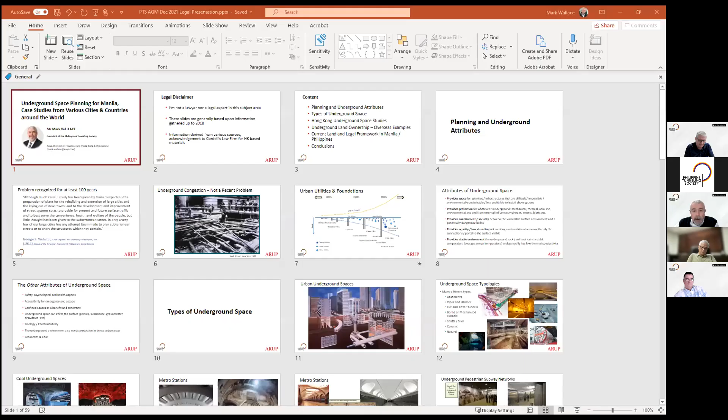Can that be seen? Can you see that? Hi, Mark. Yeah, we can see all of your slides. Okay, there you go. There, yeah, you can see your presentation. You can see my face.

Excellent. Okay. All right. Well, this evening, ladies and gentlemen, I'd like to run through some underground space planning reviews that we did for the projects in Hong Kong and also in Singapore. So I want to just give you a flavor of the different strategies that have been done for underground space planning in other cities and countries around the world.

So I have to put a legal disclaimer in first and say that I'm not a lawyer, right? So some of this information that I'm going to present is from a few years ago, but most of it should be still current. And I have to give credit to a law firm that helped us in Hong Kong when we were doing some of the materials about the legal aspects of land supply and underground space in Hong Kong.

So tonight I'm going to run through these aspects, planning and underground attributes. This is the subject matter that I'm going to go through, and then hopefully at the end run through some insights or conclusions from my brief period in time in the Philippines, how maybe there could be better planning put in place for some of the upcoming metro systems and underground metro systems that are being implemented in the city.

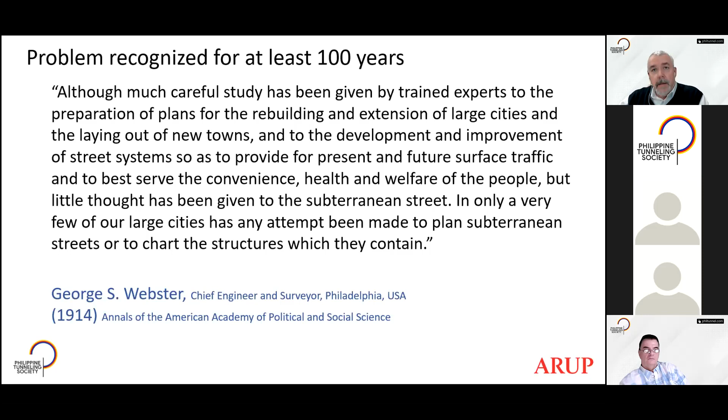What are we talking about? So, the underground and how we use the underground is a problem that we've recognized for a long time, actually. In 1914, the chief engineer in Philadelphia recognized that little thought has been given to the subterranean streets, and only in very few of our large cities has any attempt been made to plan the subterranean streets or to chart the structures which they contain. So this is talking about really utilities and all the things that go in it, right?

And this is a photograph from Wall Street in 1917, and you can see this is exactly the same as what you see in the ground in many, many cities around the world. Manila obviously has a lot of this above ground, where you see the cables and so on, but underground you see all of the pipes and networks that crisscross. It obviously needs to be managed and understood really quite well.

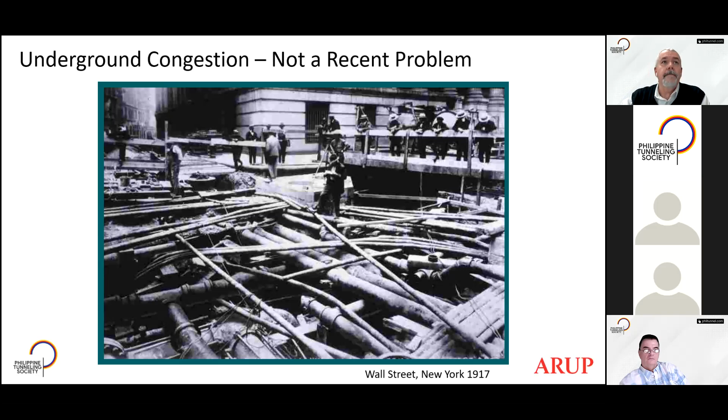So as we progress through our urban growth, from the 1800s up till now, there's been a transition of different types of things. Foundations have progressed through shallow foundations, wooden piles, caissons, Franki piles that were in vogue in the mid 60s and 70s, barrettes, mini piles, and so on. As we've done that, we tend to find that these piles and foundations go deeper. We also tend to find that they're supporting heavier structures.

And in addition to that, the congestion of all of the other supporting infrastructure, such as sewage, water pipes, and utilities, is also tending to get deeper. And that's just a function of these systems all being on top of each other and being congested.

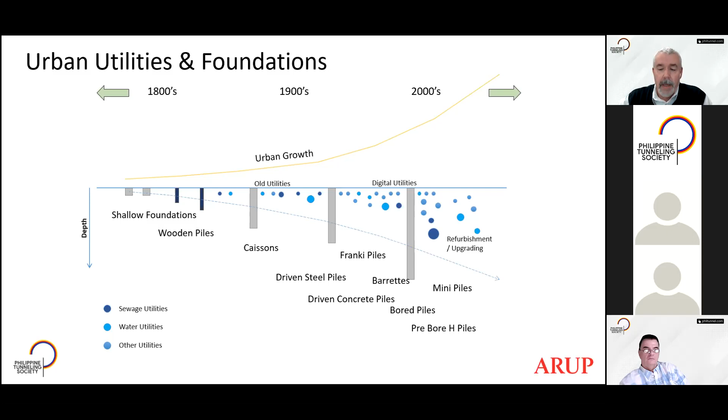So what is it with the underground that we like to have? It provides space. These are the attributes that people think about when they're thinking about the underground. It provides space for activities and things that service our cities. It provides protection where we need it. It can provide mechanical, thermal, acoustic protection for things that go in the ground, and removes impacts from wind, from blasts and other things.

It provides containment, so it can be used as a secure place to put things, and also protect us from the impacts of any particular dangerous facility. If it was an underground magazine, for example, it obviously reduces the impact of blast and so on. And then it also provides low visual impact. When you go to BGC, you see that most of the utilities are underground. All of the overhead cables are now hidden below ground.

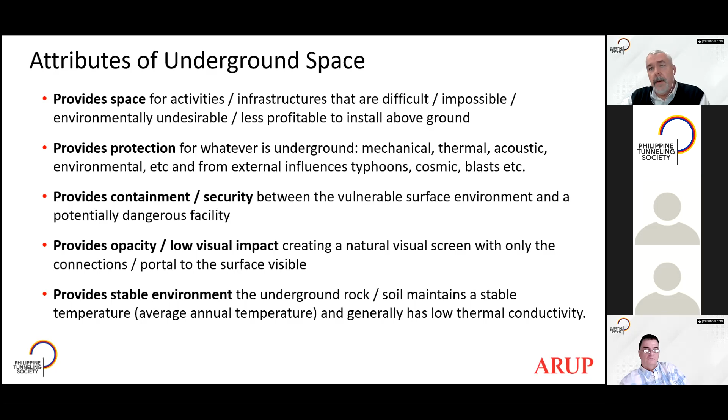It provides a stable environment. When we talk about sustainability these days, we talk about the use of energy and so on. And when you look at the ground, typically within the top 10 meters, the average annual temperature is the temperature that the soil and the rock generally will have. And it has some low thermal conductivity properties that are sometimes useful.

But some of the other attributes of the underground relate to the psychology of the underground. You feel worried when you go underground. People think that it's not so safe, and it can have health problems because of air quality and so on. But certainly in Hong Kong, where I am just now, many millions of people travel underground through the metro systems, and they don't really notice it because it becomes part and parcel of the work and lifestyle in cities. And that's what's going to happen in Manila soon, when the metro systems come and people get used to traveling underground.

There are other problems for emergencies and escapes. So, you know, when there was the sarin gas attack in Tokyo, Japan, how to get people out and do that safely. And then confined space can have that benefit and also have constraints such as evacuation and getting out of the ground.

But there's also problems where we have the underground and we have to have the entry into the ground. So portals, how do we get entry into the ground? We have other aspects of construction, subsidence, groundwater drawdown, and then the type of geology and how easy is it that we can build the undergrounds through the pipelines or the basements in the cities that we have.

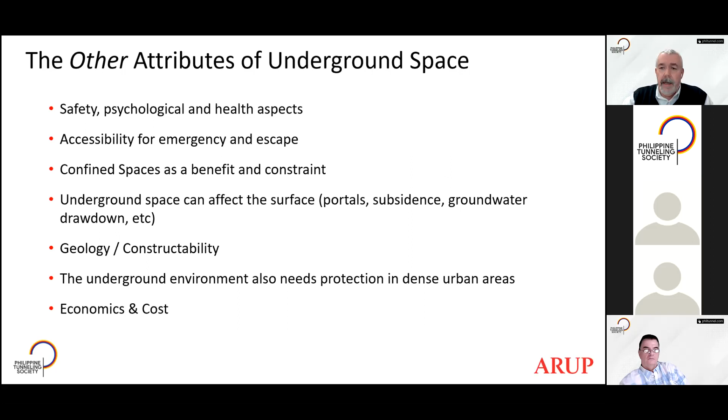And the underground environment also needs protection in these dense urban areas. So if we want to use this corridor for a tunnel or a pipeline or whatever, maybe we need to protect that in some way. And then obviously the economics of the whole question of going underground, it does cost more and it does have an impact in terms of how you can use it for development.

So what are we talking about when it comes to types of underground space? So back in the 1960s and 1970s, and maybe even earlier than that, in the 50s, there was this sort of urbanism that had this vision that we would all be living underground and sleeping underground and have residential underground. And this sort of came out of the Paris urban ideas, and the French architects and so on were quite keen in trying to push this forward. And many of these integrated urban underground schemes were put forward to try to connect in with the metro systems in France and other cities around the world.

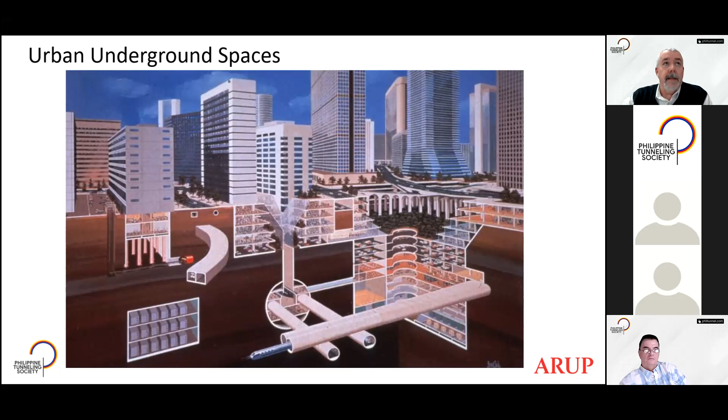So there's different types of underground space that we typically talk about. So we have basements, and we know that in Manila, in particular, there are really quite deep basements. And some of the questions, I suppose, is are these used as effectively as they could be? There's pipes, cut and cover tunnels, bored tunnels, mechanized tunnels, shafts, and so on, as well as caverns. But there's also natural caves that you can also get in urban areas. So these are the typical things that we think about when we consider underground space.

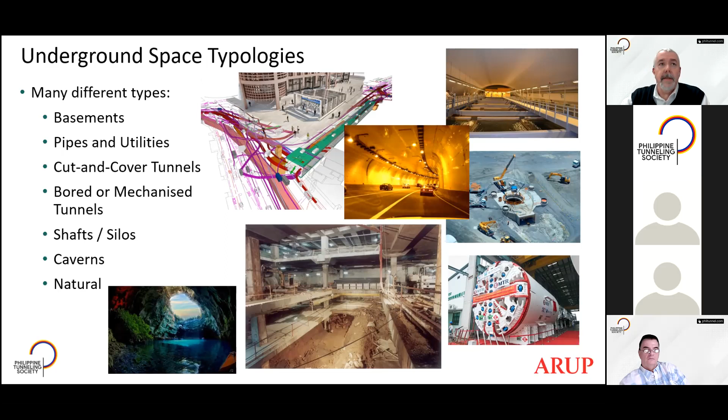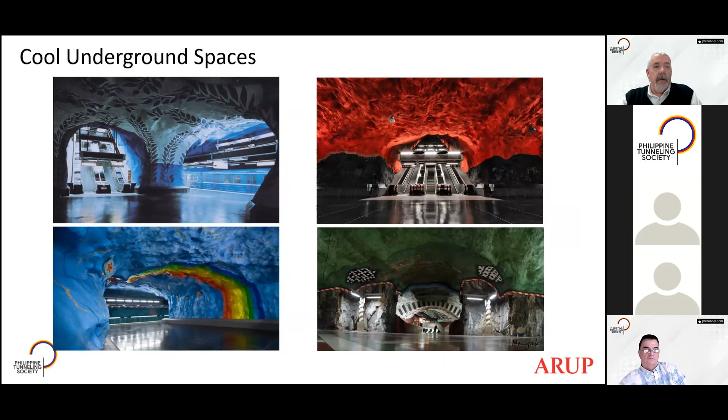So these are really cool. These are photographs that come from Stockholm Metro. And this is the underground metro system, which lies in rock, and these are rock caverns, but you know, you can create really quite cool underground spaces for metro systems. And this is a great example, I think, on how you can form these spaces and how you can make them look nice and usable.

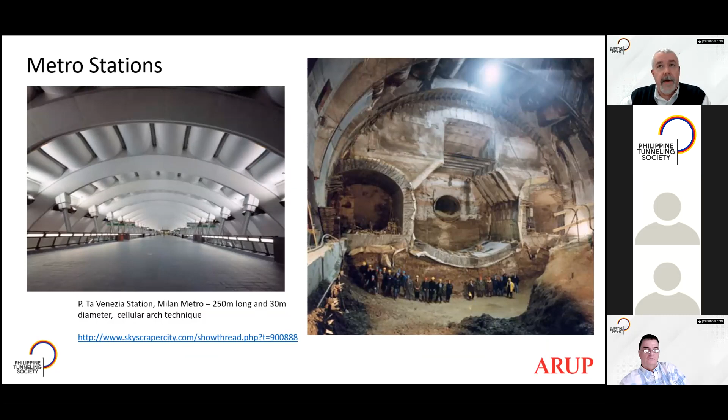And then you get these sort of functional metro stations. So this is Milan Metro, Venezia station. And you can see here the actual support that's put into the soft ground excavations for this particular station that form a sort of architectural aesthetic that really looks quite nice. So again, the functional aspects of how you build it, you can incorporate into the space that you create.

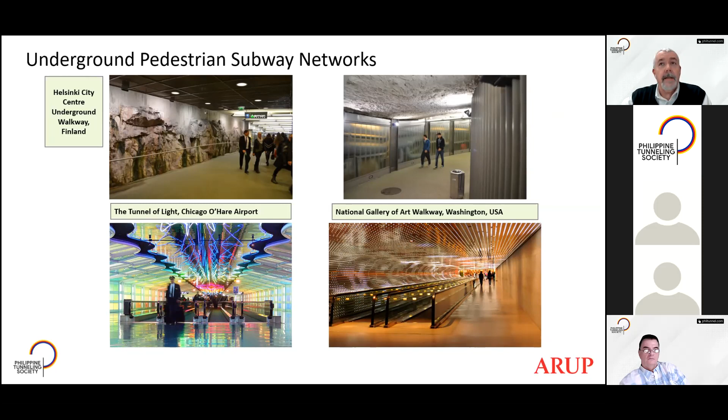And then also you have pedestrian subway networks, and increasingly these days people are starting to put in these LEDs and making these underground spaces look quite bright and welcoming. And some places they're becoming attractions, such as in Taiwan and Kaohsiung. There's an underground dome of light that also attracts people as a tourist attraction.

So in particular in Hong Kong, we have some networks such as here, connecting between East Tsim Sha Tsui Station and Tsim Sha Tsui Station. Very sort of more functional type of spaces where it's just a flow of pedestrians and people from one station to another. But there's also connections into adjacent retail. So some local shops and developments have access directly into the network to allow people to be attracted into their shops and spend more money.

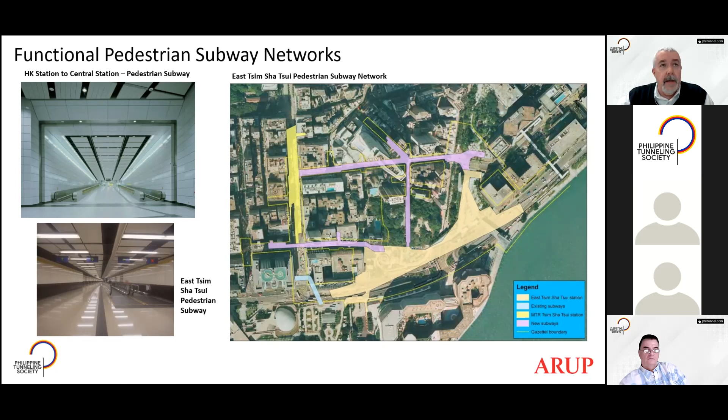So where we see certain types of ground conditions, such as the marine deposit shown there on the left, maybe there's more likelihood of settlement and distress on the buildings, and some of the piles might become problematic. And then similarly, where you have buildings that are very shallow, if there's drawdown of groundwater, that can have impacts on it. So whenever we talk about the underground, we have to always think about the type of ground that we go through, as well as the impacts that we have, and what that has as an effect on the existing buildings and facilities that are around underneath these tunnels.

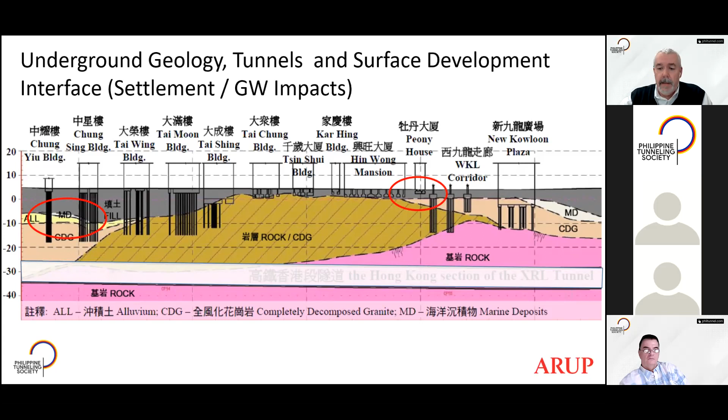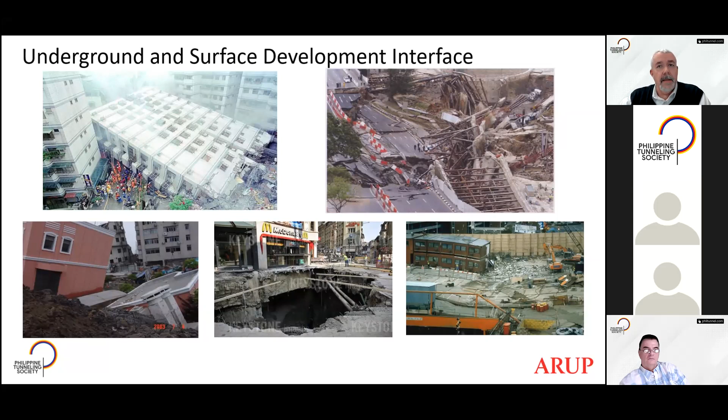And obviously, we don't want this to happen. So this is when underground starts to get a bad press. So these are some failures that have occurred as a result of tunneling or deep basements or deep excavations. And this is what we want to avoid, but sometimes these things happen, unfortunately. But you know, we try to get lessons learned from these and try to make sure that these don't happen again.

So in the studies that I've done in Hong Kong, we were really looking at two types of underground space. So we were looking at rock caverns, and we were also looking at urban underground space. So Hong Kong has a sort of unique side to it because it has very high property land values, it has steep terrain, it has urban areas that extend up into the hillsides. So the challenge here was with Hong Kong government to try to see how we can utilize some of these underground spaces and utilize the hard rock mountain areas to transfer existing government facilities underground, and then use them for land sale to get additional areas to develop.

And then the challenge for the urban underground was to see how we can reuse or utilize local areas within the urban settings, such as parks and so on, build underneath it, then reinstate the parks, and then utilize that for more creative uses, such as clinics and sports centers and so on.

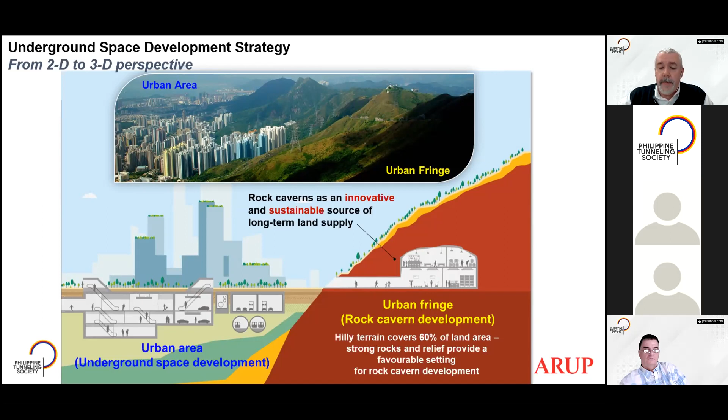So typically, these are the types of underground space applications that we have in Hong Kong. So we have retail in basements, car parks, and we have connectivity through pedestrians, road and rail networks, as well as other types of flood prevention, retention tanks. We've got tunnels that take away surface water from the hillsides, utility tunnels, cable tunnels, as well as underground water treatment and sewage treatment and service reservoirs.

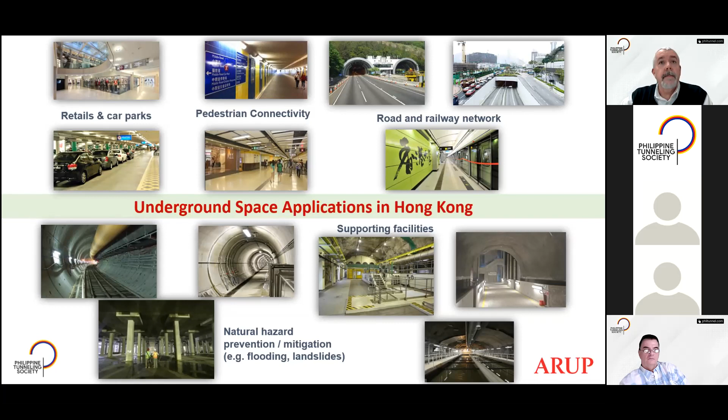So in Hong Kong, one of the land ownership issues that we have is that when somebody owns the land or has a lease on the land, they own the underground to the core, and they own the airspace above their property all the way into the stars. But there's also some specific ordinances that have been enacted, such as the Sewage Tunnels (Statutory Easements) Ordinance, as well as the Mass Transit Railway (Land Resumption and Related Provisions) Ordinance. So the city has controlled how it preserves and maintains the aspect of ownership and provisions for safe access and safe operation of these utilities and infrastructure that are placed in the underground.

So it tends to track it. This is a screenshot from the Town Planning Board in Hong Kong, where there's a digital register of all the different land uses from the statutory plans that are found in Hong Kong. So you can go on the website and you can see what uses are there, and when you click on these polygons, you get a display of what are the permitted uses that they have within them, and these can be allowed to be underground or above ground.

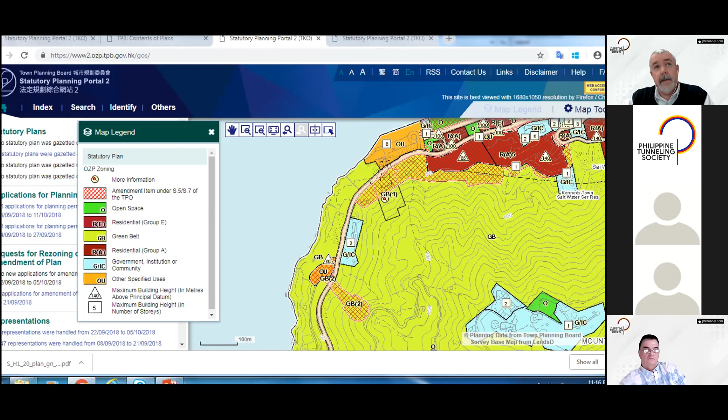And one of the outputs from our study was to look at how we can try to identify places on the hillsides that I mentioned earlier, where we could put strategic cavern areas. So these are areas where caverns could be put into the hillside so that existing government facilities could be relocated. So we developed this cavern master plan, which is one of the first in the world, to strategically identify government facilities that were suitable to be transferred into underground spaces.

So it had to be planned in such a way that it had good connectivity, it had portals to be able to be entered into the ground, and the rock and the geology was generally good enough for that to be done around the city.

So Hong Kong itself, through those studies, they were looking at there's a set of standard Hong Kong standards and planning standards and guidelines that are used by the planning department to control and to identify what can be built in terms of the planning of the city.

So one of those was to look at the sort of examples around the world of what gets put underground, and then the HKPSG was to be updated and include other types of land uses that we know can be put underground, and then prepare some guidelines and some standards to be able to effectively place them into the hillsides in Hong Kong.

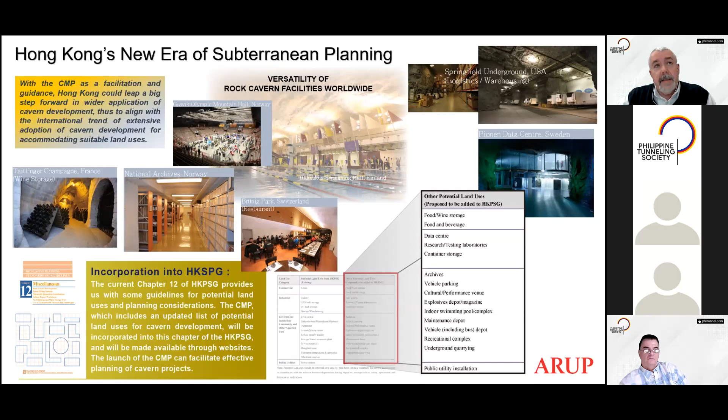Other examples that we've identified through these previous studies overseas usually relate to what sort of land ownership is, right? So we've done these studies and we've looked at the different types of legal frameworks that usually get applied. And here, in many countries around the world, the common law approach usually means that whoever owns the land also owns the airspace above the land and everything beneath it. So the same way that I showed earlier about Hong Kong, you own everything up to the stars and everything down into the bowels of the earth.

There are usually three notable exceptions to that. One is that the minerals and mining rights of minerals that are below your property are owned by government, and usually coins, bullions, and treasure troves, as well as antiquities, will usually be owned or have some value to government or to historians in the countries or the cities that you're operating.

In terms of land ownership, usually through those underground limits, these are the cities: London, Paris, Seoul, Taipei, Australia, and so on. Usually the common law countries that have this sort of ownership, which you can see there on the right, so to the bowels of the earth and so on. So usually in those places, you need some form of legal recourse to occupy the spaces between the public land that goes through the private land. And in particular in China, for example, with the state-owned land, you usually get a lease provided to occupy those spaces.

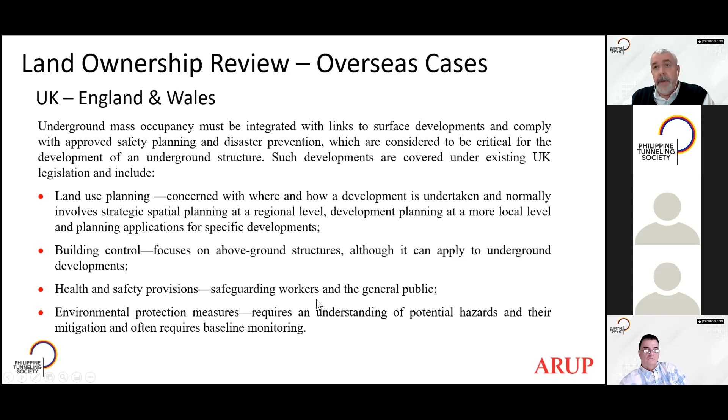So in the UK, when you're thinking about the underground and land ownership, if you're trying to develop somewhere, there are certain control measures that are usually imposed. So through legislation, there's land use planning that usually controls the type of spaces and development that goes above ground and below ground. And when you look at building control for underground, you usually have to ensure that you have good control, so you don't have a major impact on adjacent structures. And then you have controls through health and safety provisions for workers in confined spaces during construction, and the usual environmental protection measures that get applied when you're thinking about doing underground spaces and so on.

And in particular, some parts of London, for example, have this phenomenon called iceberg houses. Because of restrictions on building up, people have tended to exploit the underground by extending their properties below ground. And because of many problems that occurred because people have done them badly or with bad design, many councils, especially in London, have a requirement to do a basement impact assessment, where you have to do all of these things shown in the bullet points about how you can construct it safely, so you're not going to impose any changes on adjacent areas. You do flood risk assessments and plan how you're going to get rid of the soil material and so on. But in some places, these iceberg houses have more GFA underground than there is above ground.

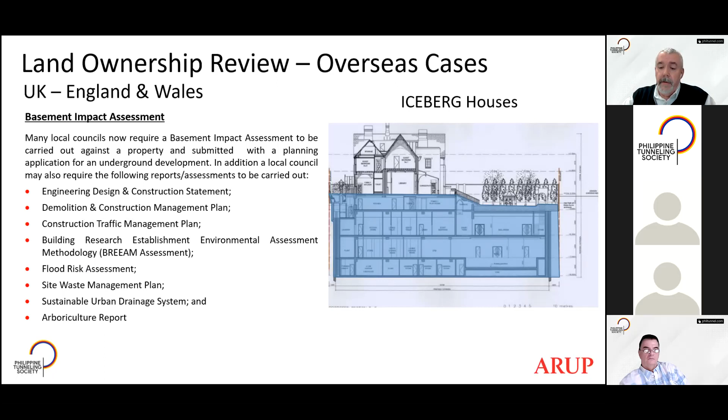Another example was in Australia, where the city of Sydney was looking at doing an underground master plan, and that was being put forward. But this is more about a case of whether you have an advocate. So you have people who are interested in making sure that this is controlled properly, and you have a vision of how you take it forward. And in this case, this initiative lost momentum because there were changes of key personnel in the city. But since then, many underground projects have been constructed, even though this wasn't there, but maybe they could have been done better if this had been put forward.

So other cities around the world have got different types of plans. Beijing has an underground master plan based upon an accessibility aspect. So it's about how easy it is to do things within certain depths, right? So they have some criteria that they have, and they are linking their above ground with their below ground master plans. And they use a depth sort of approach.

In the same way, Shanghai has done the same thing. So the top 15 meters is considered to be easily accessible. And then as you go deeper, there's a layering of the different aspects of the infrastructure that support the city that then are utilized at different levels. And usually the deepest level is the level at which you want to have limited access and less people going to, and it's really for the most significant sort of infrastructure that's going to be put in place.

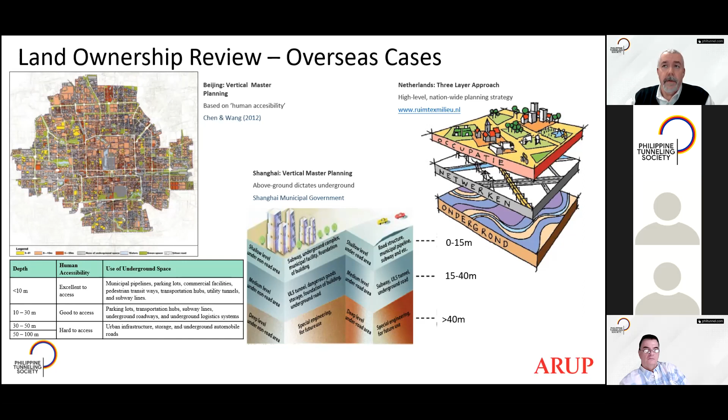And in the Netherlands, in a few cities in Antwerp and so on, they have a layering approach, which is all similar. So it's a very common theme that we have around the world of people saying there's a top layer, there's the occupation layer, there's the network layer. So in Holland, they consider infrastructure would go in the second level down. But in this case, they also look at the preservation of the water supply and the resources of the water. So the underground that they put there is about preservation of that, because they use it for water supply and for those other things to do with boreholes and wells and so on.

And another thing in China, there has been a drive in the recent past to do a lot of underground developments, and the government has had many initiatives to push these forward, and they've been allowing the developers to have the underground space as free GFA. So, you know, who wouldn't want free GFA when you're going to build your shopping mall, your shopping center or whatever? So this is where the government has actively promoted the underground and allowed these things to be built for free in terms of the allocation of the space and the taxes and charges that are placed on those developments.

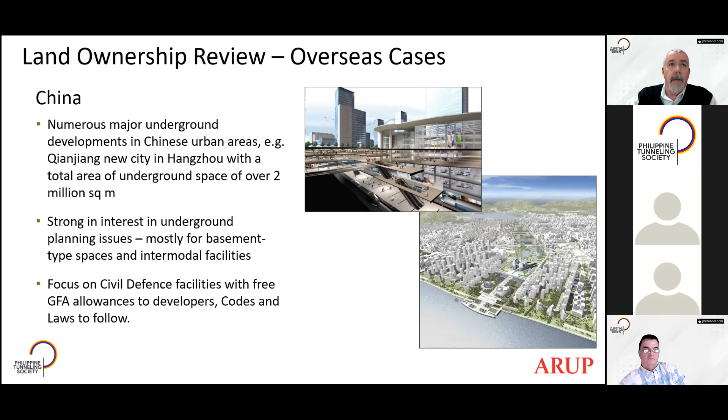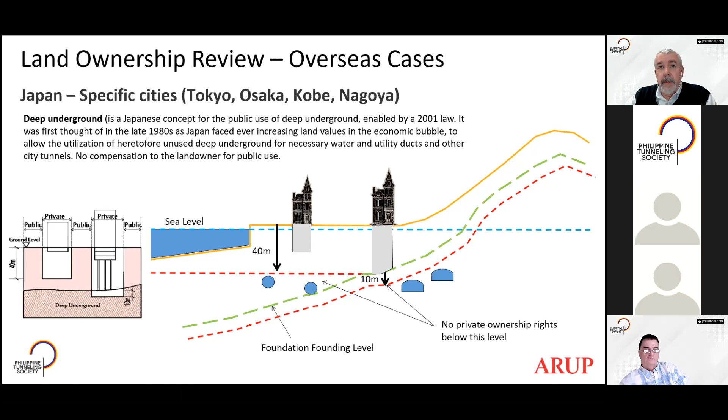So they enacted in 2001 a law that says that you can own down to 40 meters the land underneath your private lot, or where you have foundations that extend down to some bearing stratum, you have another 10 meters below that bearing stratum. And that was to try to look at how the underground can be more easily managed and developments and infrastructure put in place without having too much trouble. So this is one of the examples that is sort of similar in some ways to what has been done in the Philippines.

And in one particular place in Marunouchi, there was an opportunity a few years ago where the major landowners there, Mitsubishi, got together. So the private sector got together and worked with East Japan Railway to put together a plan to create an underground integrated network for people to circulate off of the Tokyo station.

So they put this committee together. They then organized themselves to create a set of defined guidelines and rules over how you connect, how you will provide air conditioning, how you provide electricity, who provides what. So there's a set of rules that were put together, and it's a PPP type partnership where they try to integrate this for the benefit of the users in the area and the public.

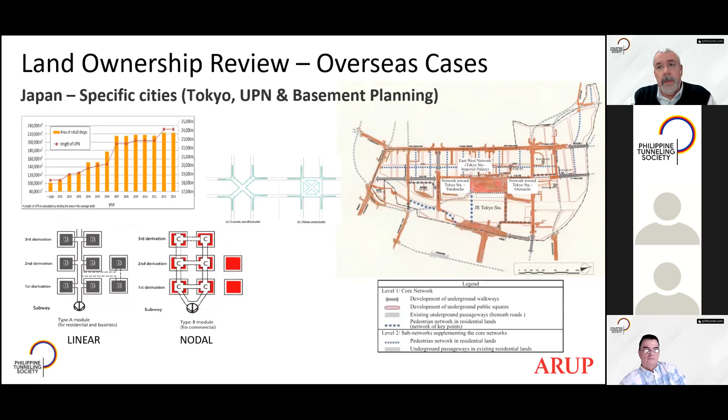And one of the big drivers of this in Japan at the time was a GFA exemption on retail or underground retail, which drove a lot of that actually. So you can see there in the chart the underground pedestrian networks and so on, and retail shops that were being promoted in Japan. So again, this was a concerted effort to connect different buildings, different places together between the public and the private sector, which was quite successful.

So they did a set of classifications of the different types of underground networks that they had. So all of this was managed throughout this particular area to connect between the railway stations and various buildings.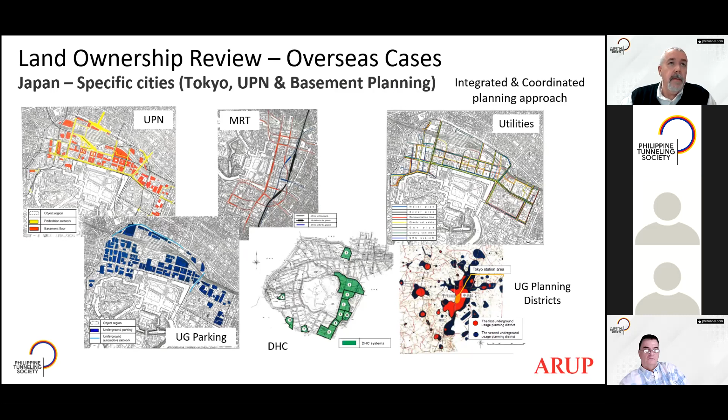So Singapore has also recently done another land ownership Act, where they have put together a definition of how deep ownership occurs. So they've defined it as a 70 meters reduced level. So this is a datum over which you don't own the land, right? Or you have to request a right to use below that level because the building needs the deep foundations.

So this is an act that was put in place in March 2015 to try to control the underground for the public sector uses, and to allow further development to occur underground below existing buildings.

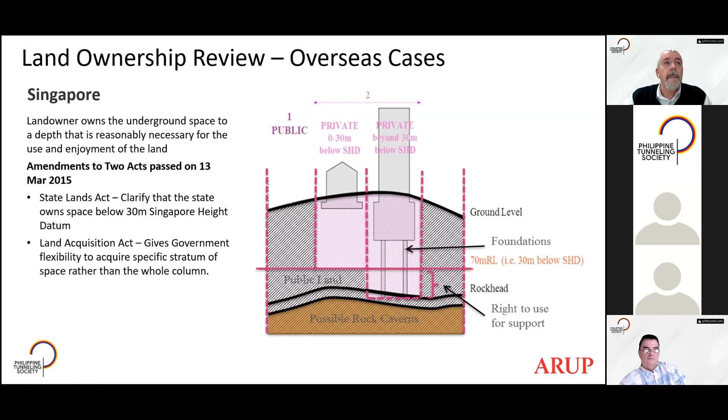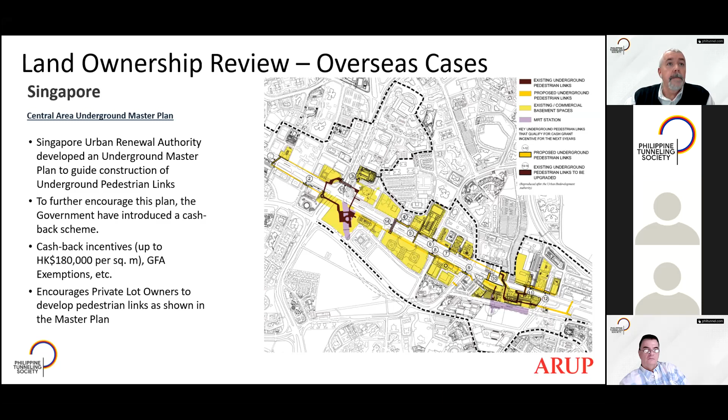And then up to about 2019, Singapore were studying this underground master plan. So Arup were involved in this, and we were involved in looking at the different uses and so on. And again, the same theme is about how the layering goes and what different types of uses you would be able to have in different portions of the ground. So on the right there, you can see the different conceptual ideas of where things would lie in terms of the depth in the underground.

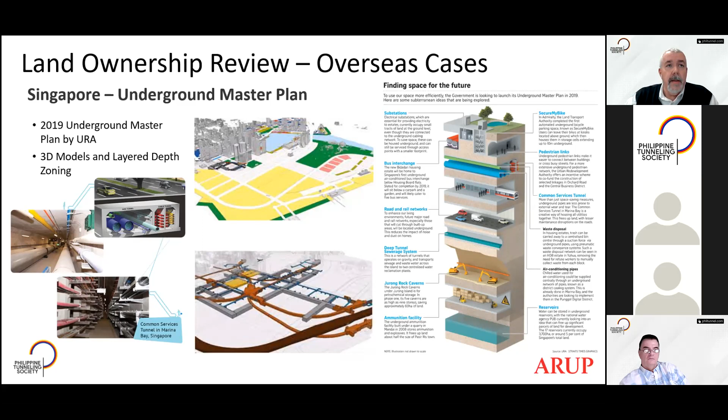And they were thinking about caverns, so rock caverns that they would be putting in place, but these were quite deep. And there was definitely concerns about how deep you would want to have people occupying some of these spaces. They're really looking at the shallower areas because some of the rock is really quite deep in Singapore. But they implemented quite a few common service tunnels, so utility tunnels. This was quite common in the reclamation areas. So down at Marina Bay, there's some utility tunnels there that service these development areas.

So the underground master plan links itself with the above ground master plan as well. And they're looking at the future of how this can be expanded around the city. And in particular, they're looking at the data aspect of it. So they're trying to build 3D geological models. They're asking developers and the infrastructure to provide BIM models and 3D models of all of the as-built details. So they're building this database of the geology, the ground conditions, to allow them to understand what's in the ground and be able to better manage how the future underground networks are implemented.

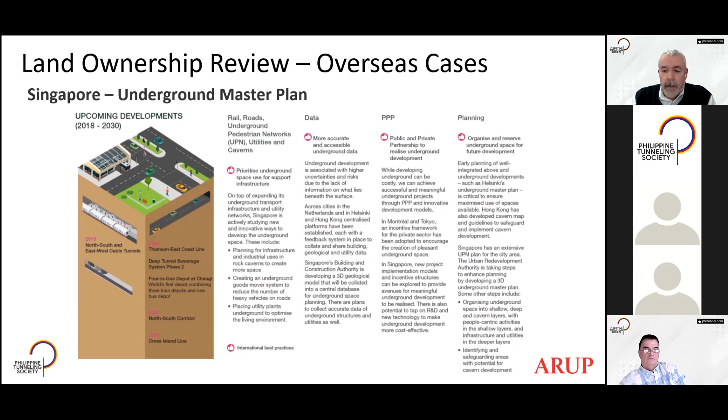So an interesting one in Malaysia was when they were looking at the metro and the MRT in Kuala Lumpur. They didn't have any ownership rules, so there was an interesting concept where they asked people under the right of way to surrender and re-alienate their premises. So the owners would give the land back to the government. The government would then change the titles and the conditions of sale and the conditions of title, so that they could then reoccupy the land underneath it. So there was some compensation given, but this was a way that they did this provisioning to allow the metro to go underneath their lots, because they didn't have a law in place at that time.

So Helsinki is another good example. This is probably one of the few places in the world where there's a statutory master plan for the underground. So this is one of the first cities that actually pulled together one, which then tried to preserve and plan and predict what other things would need to be built in the future. So they used it to not only do underground planning now, but they were reserving places and had resource areas that would then be used later in the future.

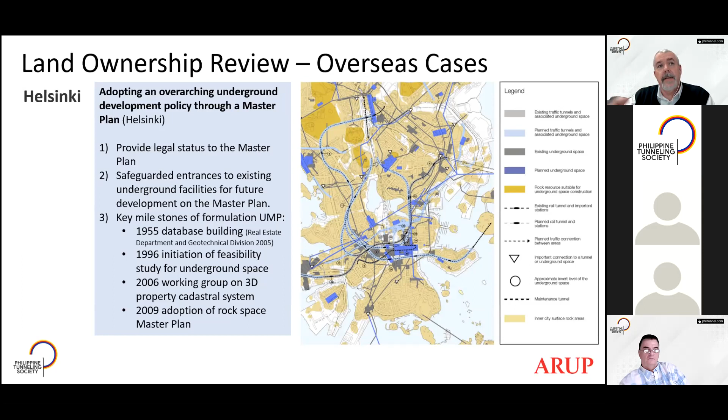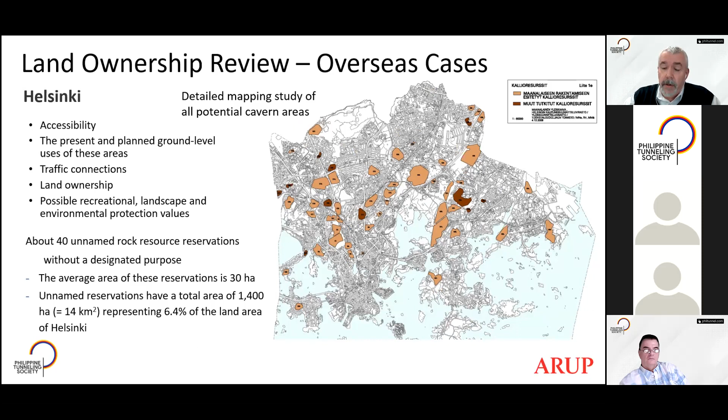And this is now promulgated as a legal document. An interesting thing for this was that they had provisions in here for areas that could be reused or were not allocated for anything, but they would then be places that could be utilized by the private sector or others to have some underground uses. Typically, these were for rock caverns, because in Helsinki, the rock is quite shallow.

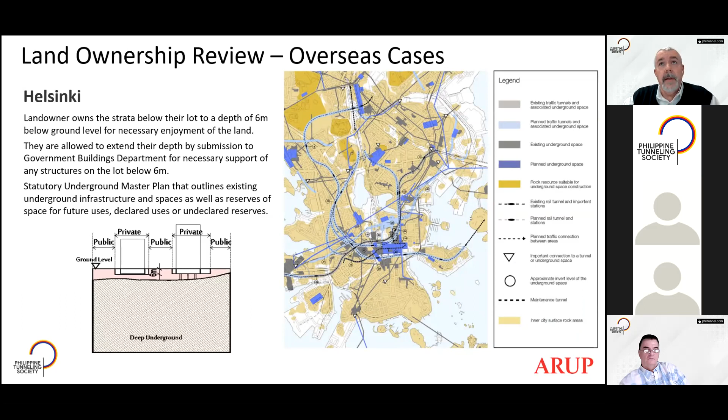So here, for example, you can see, the law at the time stated that you only had the right to use it down to 6 meters depth from your property, but you could extend down to rock if you needed to do that. And so that was the legal basis of the underground in Helsinki. So they have set up a 3D cadastral system. So all of these underground spaces are mapped now in GIS, and they're mapped as a set of three-dimensional objects that then can define what the underground space looks like, what is there, what is reserved, and what is available for other uses.

Another one that was quite interesting was Montreal. So Montreal has a huge network of underground spaces, or underground pedestrian networks that are connected to various developments. And the approach here was really through a redevelopment of one particular area. So the city bought up a large part of some downtown areas to do a redevelopment. And when they did that, they had this great idea in the 60s and 70s to allow people to have access through private developments.

So the driver for this to become such a successful connected underground network was that when private developers bought their land, they had a duty of care and a duty to allow access to the developer who's behind it. So when the metro station was put in, the first guy would then connect to the metro station, and then the guy who's slightly further away has the right to connect through the other private developer, right? So in this way, it was easy to connect because there was an intrinsic right that the developer that's further away from the station could get the right to connect, and there were rules set in place in terms of times of opening and how the access rights would be provided through each of these developments.

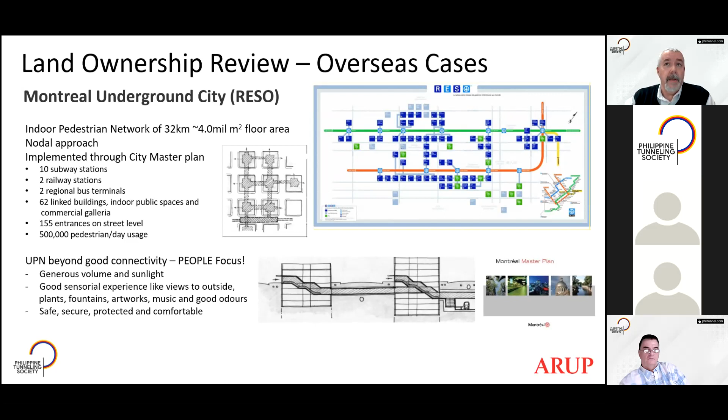So this is one of the success stories, and personally, I think it was a great visionary idea that they had at the beginning to create these networks, which have been quite successful. So in Montreal, their initial provisions were to look at the depth of 10 meters, so you own it to 10 meters depth, and the government owned the land below that.

So, the current land and legal framework in Manila. In comparison with what other cities have done, I think Manila is just at the infancy of what it's trying to do. We have, through MMDA, the LGUs and regional development councils, various plans and land use plans that are applicable. But I think they don't really go into much detail about how the overall planning will be done; it's only really at general land use levels and not specific land use levels.

So in 2016, there was some legislation put forward, RA 10752, which limited the depth of the ownership to 50 meters below a private property. But this is only for national government projects that are ongoing, or BOT, build-operate-transfer, type projects, where a concessionaire would build it, and then they would have a right to go below 50 meters. But if they went within 50 meters, you would have to then go and ask for permission, or you get your usual expropriation type of aspects of right of way for that.

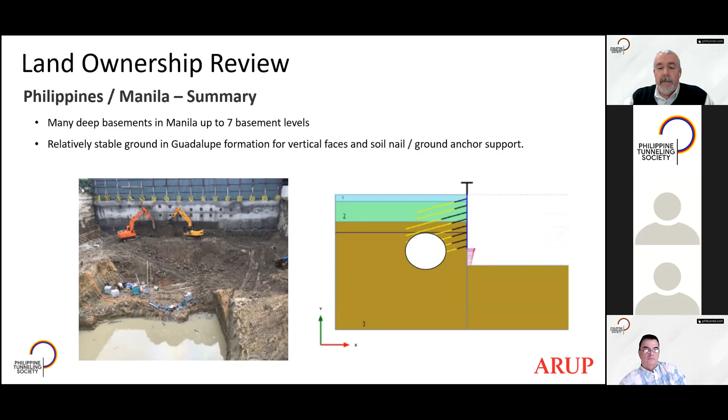So in conclusion, I think that there's a great opportunity in the Philippines to pull together a master plan, especially for Metro Manila. We're at the infancy of the metro systems and stations to be put in place. If there was a chance to have a coordinated master plan to better manage and connect through to the different stations and facilities, that would be fantastic. There is a demand for many other types of infrastructure, such as water mains, sewage mains, and so on. And I think we need to have it integrated into a coordinated underground master plan.

And similarly to what's been done in other cities around the world, this concept of having a land registry with 3D cadastral systems that allow you to better manage and define your underground is a missed opportunity. So I think we should start thinking about implementing it in Manila, if not in the Philippines. And other cities have looked at developing and managing digital databases of the ground, the geology, and so on, to allow people to more safely develop, excavate and build underground structures and infrastructure.

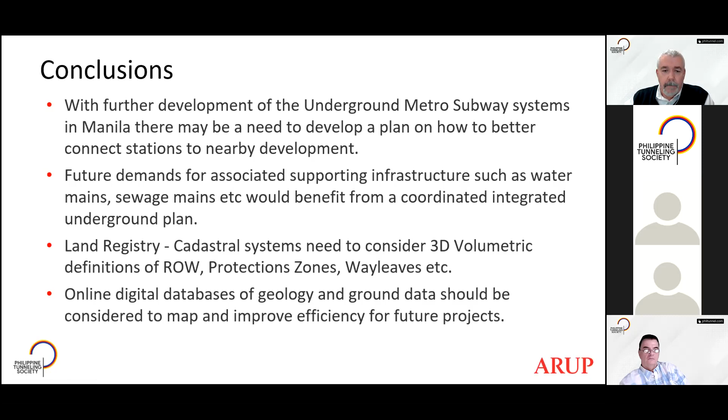Thank you very much for that very interesting presentation, Mr. Wallace. Indeed, properly planning out underground developments for the future is definitely key for Manila to progress properly. For the next part of the program, we will be entertaining questions from the attendees. So we have one question here.

What is the risk for underground structures with the Philippines being in the Ring of Fire and prone to typhoons and earthquakes? What's the risk? Well, obviously there's a risk from earthquakes. We know that the West Valley Fault, Marikina Fault runs through the city.

So, actually going across active faults is not really a good idea from a tunneling perspective. But what has been definitely noted from places like Tokyo is that underground spaces are more resilient when it comes to earthquakes. Because of the confinement, they're generally quite robust, and they generally perform well when it comes to earthquakes, as long as they don't cross active faults. And that's an issue, making sure that when you're looking at these, you don't actually do that.

In terms of flooding and so on, obviously you need to do proper studies to make sure that the tunnels and the underground space are actually away from these places, and you have proper provisions for access, and the portals and so on are protected from flood risks. So yeah. Is that a good answer?